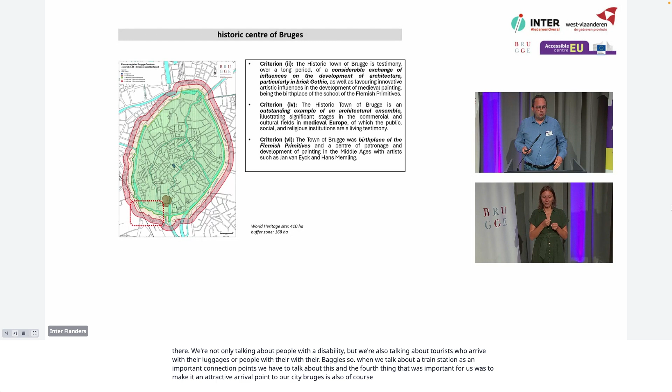So when we talk about the train station as an important connection point, we have to consider this. And the 4th thing that was important for us was to make it an attractive arrival point to our city. Bruges is also, of course, a World Heritage City. And when you see the train station, you can see that it's actually at the corner of the cultural heritage site.

We also have the station square that's actually just outside the UNESCO buffer zone - or rather, it is part of the UNESCO buffer zone. This is actually one of the 7 qualities. When we're talking about UNESCO qualities, we're talking about outstanding universal qualities, so it is important for the world. When you look around our train station, we can also talk about an attractive city.

Bruges is not Bokrijk. The station does actually show many transformations that happened during the last 150 years. The cultural heritage values are also part of it. These date from the 19th century, in the Romantic era - we're talking about walking boulevards. It was no longer Bruges-la-Morte, but part of the Romantic era. These are all qualities we have to take into account.

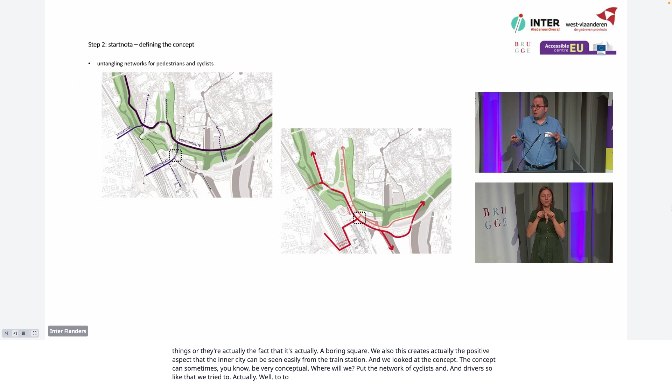Then we looked at the concept. The concept can sometimes be very conceptual. Where will we put the network of cyclists and drivers? We tried to put aside the difficulty between cyclists and people walking.

So we also went to look at the R30, where we should put the road for people walking. The first scenario we looked at was actually to put a bridge on a bridge.

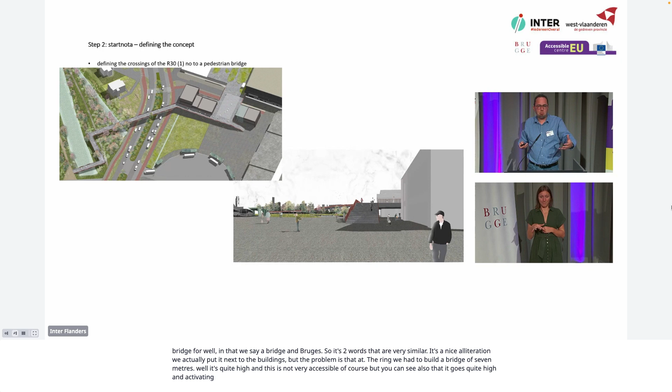In Dutch we say a bridge on Bruges, so it's two words that are very similar - a nice alliteration. We actually put it next to the buildings, but the problem is that at the ring, we had to build a bridge of 7 meters. It's quite high, and this is not very accessible, and activating the square is not possible. What is under the bridge is not possible to be activated because people will go over the bridge.

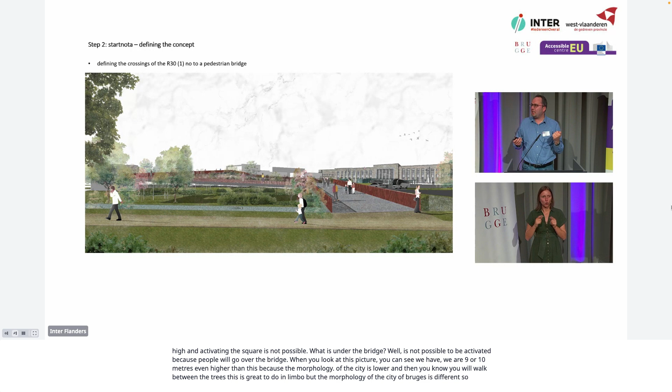When you look at this picture, you can see we are 9 or 10 meters even higher than this, because the morphology of the city is lower, and then you will walk between the trees. This is great to do in Limburg, but the morphology of the city of Bruges is different. A difference of 10 meters, when we talk about accessibility, is not ideal.

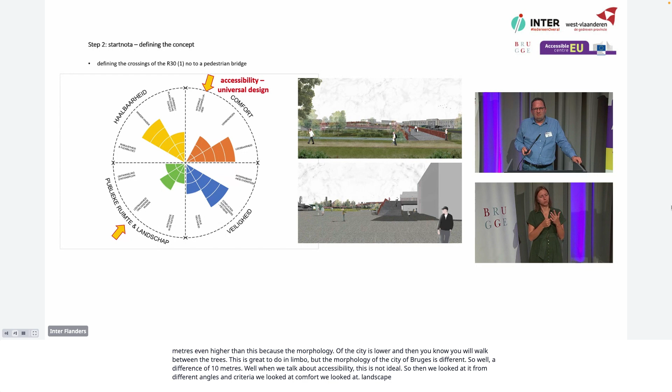So then we looked at it from different angles and criteria - comfort, landscape, and environment - and we saw that this was a very bad idea. We also had other alternatives, for example a tunnel beneath it, because we had learned that the landscape is about 2-3 meters lower, so we could go under the ring, and we could see that there were some chances there.

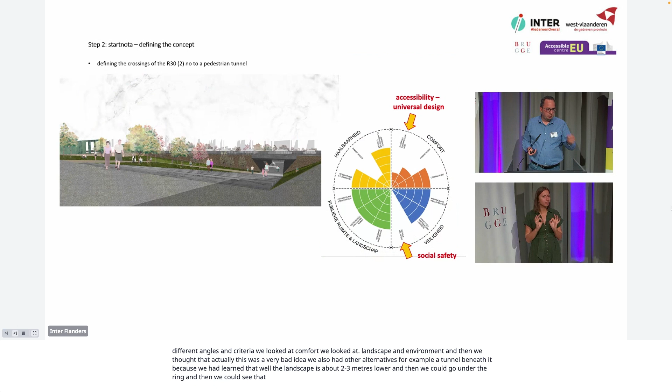This was the first image we made. There were stairs going down, but of course accessibility-wise we also had a road next to it going down. But we were talking about 2,500 people that had to pass there. Of course, this is better than going up for 7 meters.

When we talk about social safety, you can see that there is actually a rabbit hole, and especially at night, a tunnel doesn't feel very socially secure. We did think this had some possibilities, but this was not what we needed.

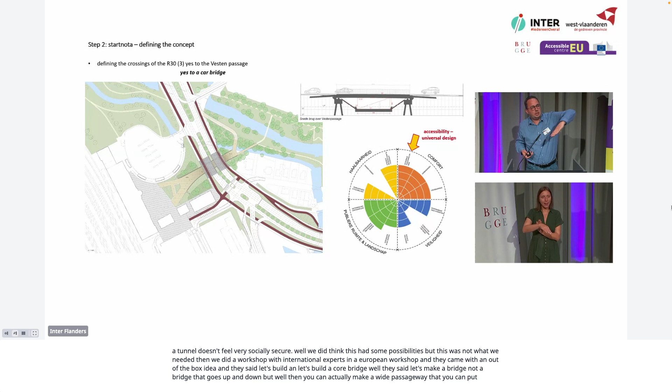Then we did a workshop with international experts in a European workshop, and they came with an out-of-the-box idea. They said, let's build a car bridge - not a bridge that goes up and down, but make a wide passageway that puts the square at 4% in height.

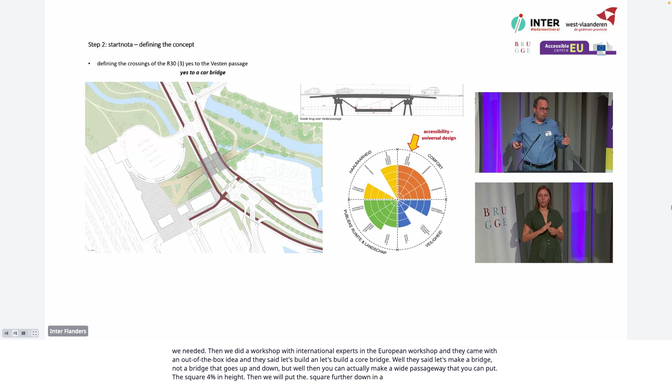We will put the square further down in a wide lane that goes down, only going down 4%, creating an open space. The social security and openness is there. So here you can feel there are more possibilities. You can also see the vista of Bruges as a cultural heritage site is also there.

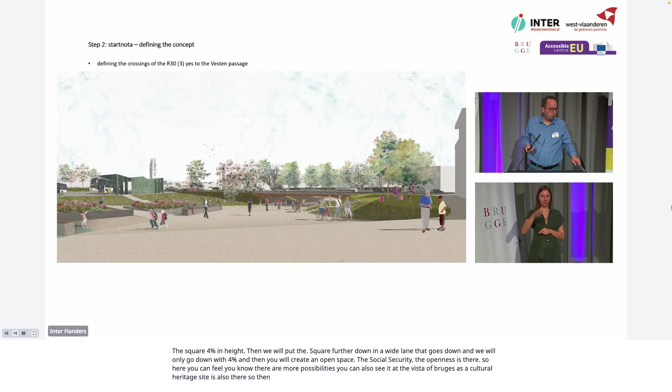So then we thought, this is a concept we would continue with. The next step, as you saw, this is just a very rough picture. Well, now we went on to a design.

So first we checked which kind of designs we could make. 4% is the universal design, this is a general project necessity. But if you work, for example, in this area, you cannot cut any trees, because we have trees that are over 150 years old. So these are the necessities. Well, not cutting trees, well, no.

Qualitatively, well, we had to talk about the architecture. It had to be a very simple architectural design for us because of the integrity, because we wanted to keep the integrity of the surrounding area.

We studied the whole file for over 2 years, because when we talk about accessibility and heritage, we want to go through actually the area of the Vesten, and this is a very fragile landscape. We have to do this. We have to pass by with more than 2,000 people on foot who walk by in this area. So you need at least 4 meters.

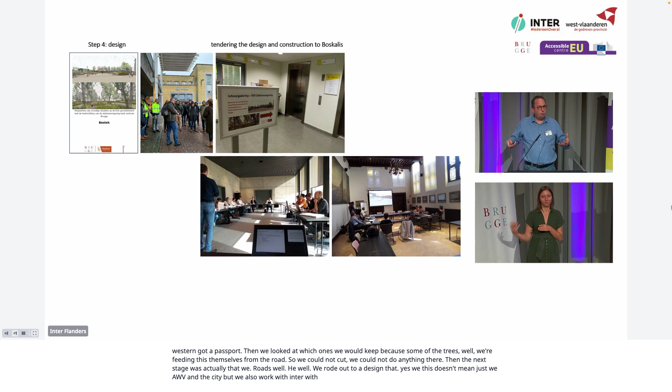Then the next stage was actually that we wrote out to a design. This doesn't mean just we, AWV and the city, but we also worked with Inter, with Marieke. They were also working with us. Also heritage experts were working with us, and we wrote out a contest.

And so, as you see, this was the final result. The concept, the passage was still there. You can see declination down. You can see how actually it's also going 1 meter higher. This was because we did not want to change the vista.

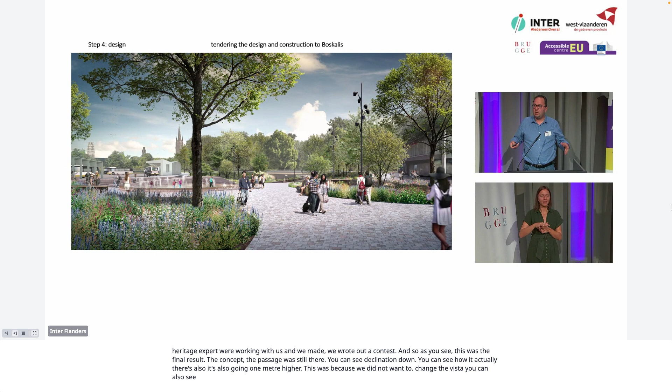You can also see that the square of the station is becoming a park. We don't want to have a transit space anymore, but a space that is nice to stay in. You can see the vista on the towers of Bruges is there. We also, there is also a fountain there, so that actually the vista of Bruges is again highlighted.

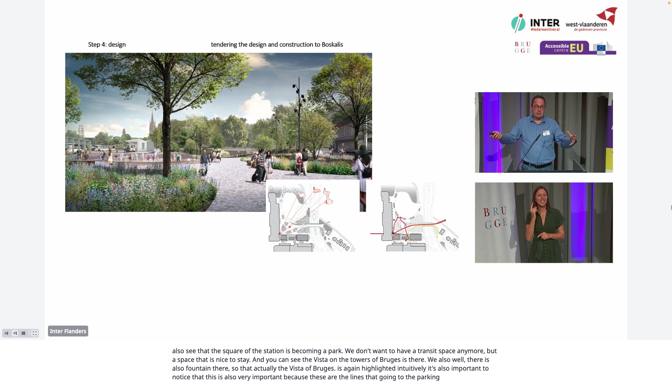Intuitively, it's also important to notice that this is also very important, because these are the lines going to the parking, the kiss and ride, the inner city, etc. We did think about all of this in this design.

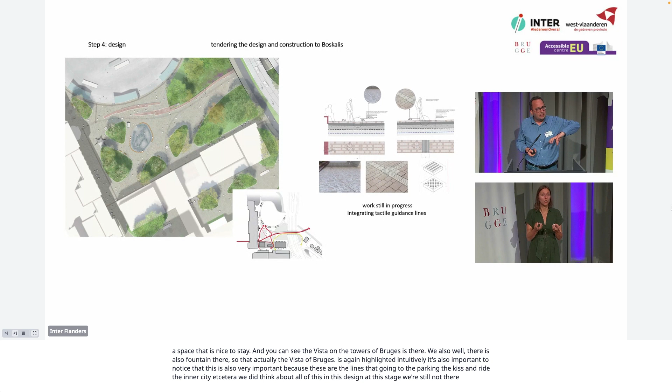At this stage, we're still not there. At this stage, we are actually looking into the design of several things. So regarding minder hinder, we will also have to look out for walking lines. You cannot have an accessible train station in a year. No, also during the works, you have to think about not hindering too much and too much of the functionality.

So what did we learn from the stations project in the long run? Well, it aligns with what we heard already today. First of all, work transdisciplinary. Today we also talked about multidisciplinary, but we want to go a step further.

It's not only important that regarding heritage people sit around the table, they also have to be able to talk a common language regarding Bruges. Not just doing things good, but also do good things. This is a project that will be there for 50, 60 or 70 years, so everything has to align.

Secondly, work iterative, so iterative planning. This is a very intensive job. This means iterative planning means, if necessary, start again, over and over again. So in the end, you might learn how it actually all works. Sometimes you might walk with your head into the wall, but you might learn something.